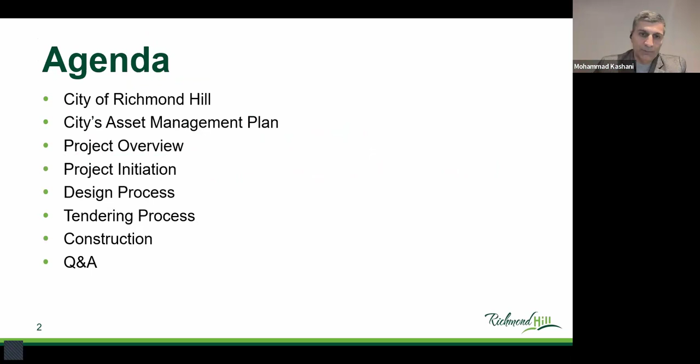The City of Richmond Hill is committed to delivering exceptional public services. Our strategic plan focuses on three pillars: growing a livable, sustainable community, focusing on people and connections, and strengthening foundational systems. Richmond Hill's balanced approach to supporting the environment, the economy and its people underpins this project. We'll explore how strategic priorities and innovative methods such as trenchless horizontal directional drilling, or for short, HDD, help deliver exceptional services to the residents of Richmond Hill.

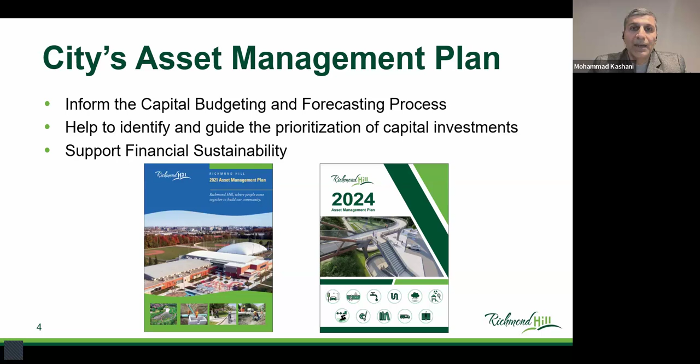Our asset management informs the capital budget process, prioritizing our investment in general and ensuring financial sustainability. We manage over 430,000 infrastructure assets like roads, water mains, sewers, parks, facilities, and many more. These infrastructure assets deliver critical services, and our approach ensures that this infrastructure remains efficient and cost effective for the residents of Richmond Hill.

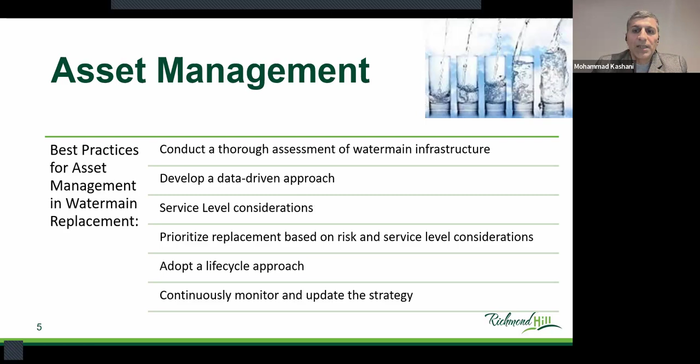So particularly for our Bathurst water main replacement program, the best practices of asset management include conducting comprehensive condition assessments, developing data-driven strategies based on these condition assessments and the risks, considering the service level standard in decision making, prioritizing replacement based on risk and public safety, using life cycle approaches for planning, and continuously monitoring these updates and strategies to make sure they are relevant. By following these practices, we ensure sustainable and effective water services for everyone.

So how do we select the project? That's why I just started from inception. I went a little bit before to tell you how a project starts from a high level, from the master plan, from the strategic initiative of the city, then into asset management. And then asset management will help us to pick the project by preparing a project need form, and then also including the project as part of the 10-year capital plan.

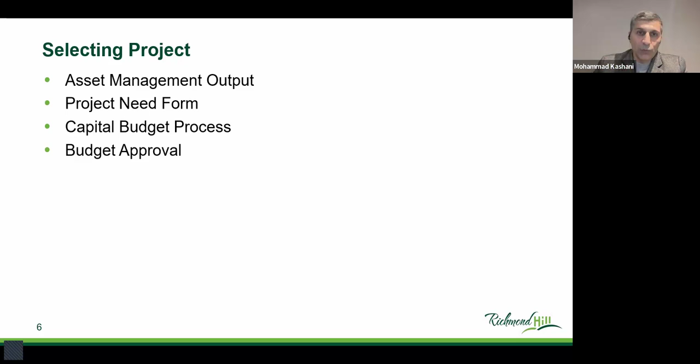We prepare the 10-year capital plan, and then we go through securing the approval from council and the budget approval from council. This process follows Richmond Hill's five-stage budget strategy, which involves planning, reviewing fees, forecasting capital needs, and approving the budget as a whole. Once the project is approved as part of the capital budget, then it becomes an active project, and it'll come to my team to be delivered.

So now we have an approved budget, and although this project has been approved and constructed, and we even went through the warranty and everything is completed, I'm just saying this is the typical approach. Going back to the Bathurst water main, this project involved replacing approximately 1.8 kilometers of aging metallic water main, including ductile iron and cast iron water main installed back in 1978. At the time we replaced them, they were 44 years old, and we experienced a lot of breaks in this stretch.

And we replaced them with PVC water main to meet the city's current standard and the MECP Safe Drinking Water Act. This initiative was vital for ensuring the sustainability of the city's infrastructure, reducing water main breaks, and minimizing disruptions to residents and businesses due to water main interruptions. Additionally, the project was carefully planned to avoid disturbances to nearby creeks, protect the redside dace habitat, and minimize tree removals and impact within the York Region right-of-way.

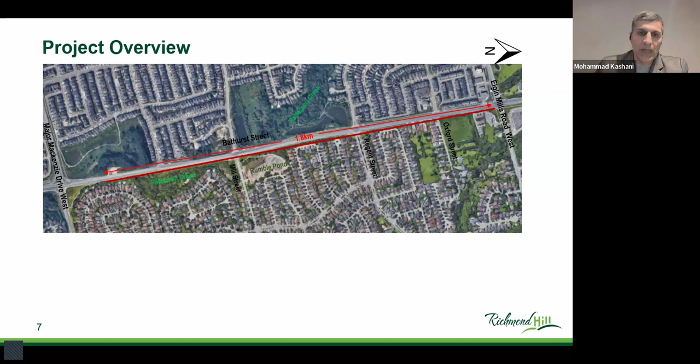I will get into more details if you need it. Because I need to tell you from beginning to end, I will try to go a little fast with the overall process and focus on the process. But really, what we are trying to do when we have a water main replacement in general: this project aimed to provide water distribution services that support domestic consumption and have sufficient capacity for firefighting purposes.

In York Region, we have a two-tier municipal government. We have the regional government, which is York Region. They look after the trunk mains and those big pipes. And then the local governments like Richmond Hill, City of Vaughan, City of Markham mainly look after the distribution lines, the smaller pipes, but the ones that deliver potable water to all the residents.

When it comes to the water main, there are two balancing factors. One is pressure, another one is capacity. When you have a bigger pipe, you have more capacity, but then you have to make sure that you have sufficient pressure for firefighting, and you need to balance these two factors. Therefore, you need computer modeling because it's a system. It's not in isolation, only the 2 kilometers. You have to make sure that the modeling gives you the appropriate size.

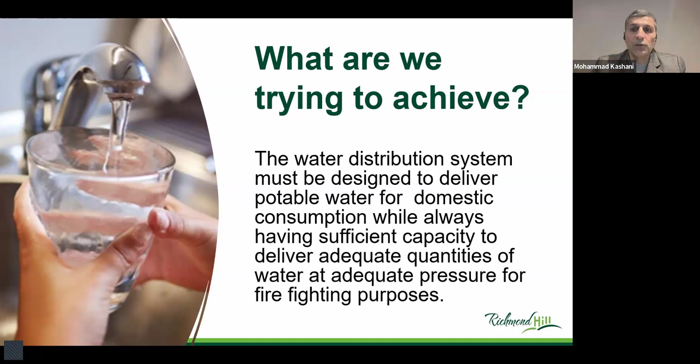So now that we have this project, how are we going to initiate it? As I mentioned, in the City of Richmond Hill we follow best practices, and one of them is to follow PMI. We have a PMO manual in the City of Richmond Hill that we follow. For instance, one aspect of that is to sign the project charter. We don't initiate any project before we get the project charter signed by our upper management, and within the project charter, we prepare the overall goals and milestones.

Once that's signed, we host an initiation meeting to gather stakeholders' input. Then we develop the terms of reference for the consultant to obtain the proposal and assign the project to consultants. And then we hold a formal kickoff meeting to introduce the teams and align on scope, risks, and schedules.

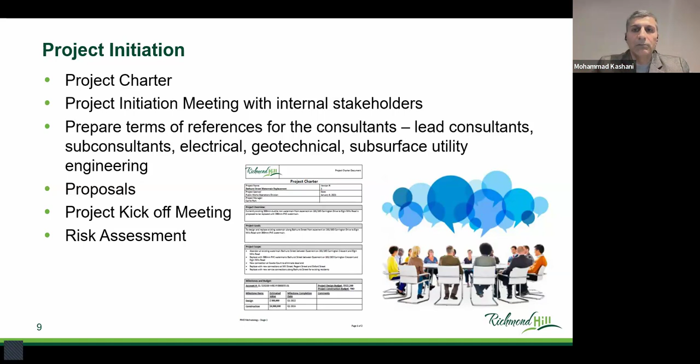So that's the project charter. And then during the design, we go through the project management plan. We look after the risk registry, stakeholder management, all these kinds of things, which starts from the project charter and goes into the project management plan, and so on and so forth, which I will mention throughout the presentation.

Once the project charter is signed and the kickoff design is initiated, technically we are into the preliminary design. And as part of the preliminary design activities, first and foremost, we need to conduct a topographical survey and gather historical engineering drawings. These steps help establish a foundational understanding of the existing condition and serve as a baseline for future design works to come.

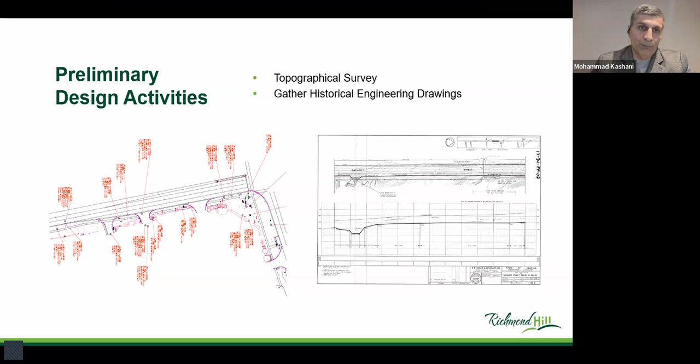The next step is to move into the geotechnical investigation and subsurface utility engineering, or SUE for short. I will refer to that as SUE, to account for soil conditions and underground utilities, which are essential for minimizing risks and guiding the design process effectively.

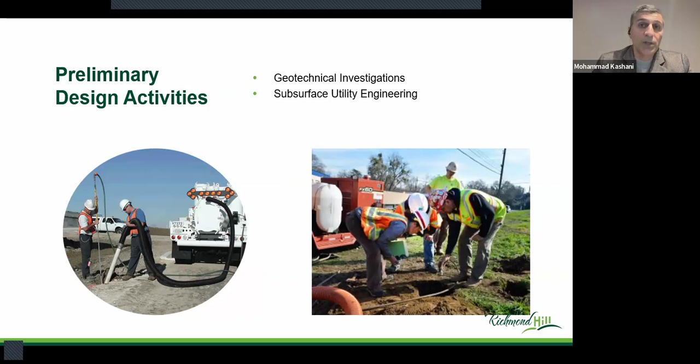Another vital component of the preliminary design activity is tree inventories. We go through that to find the health of all these trees, and then if we are impacting the trees by removal or trimming, what kind of mitigation measures do we have in place, and in the worst case scenario, what would be the compensation plan to address any environmental considerations.

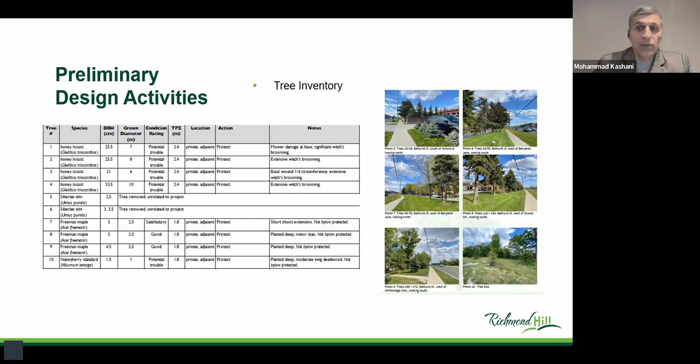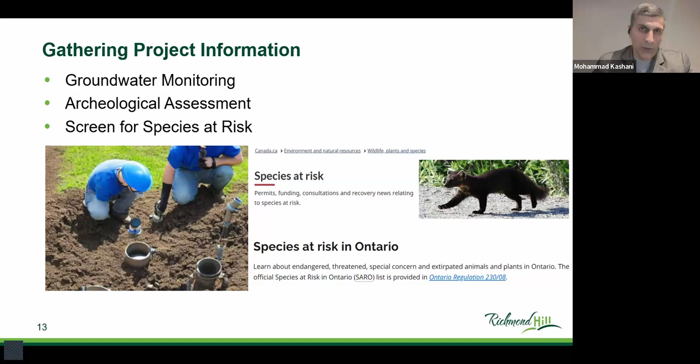Other activities as part of the preliminary would be to gather groundwater monitoring, archaeological assessment, and screening for species at risk. These tasks ensure compliance with environmental and cultural regulations, helping us mitigate risks and prepare appropriate mitigation plans.

So once we've done these kinds of activities, then we are ready to put together a 30% preliminary design. What entails in preliminary design? We need to look at the potential utility conflicts, adhere to CAD standards, and prepare detailed reports if required. And we also focus on stakeholder management, property clearances, budget allocation and schedule planning to ensure design progresses smoothly. Let me pause here, especially for water main designs.

This 30%, in my opinion, is very key, as opposed to rushing through the 30% design. I know sometimes we have a deadline and there is pressure to get things done, which we are all cognizant of, but it's very crucial early on in the design process, like at 30%, to really take a step back and see what would be the best approach for that specific project.

For instance, in this case, we could have not done that and said, okay, you know what? The conventional method of construction for water main is open cut. 80% of the project is open cut. Okay, let's go through the open cut. But that would have been a very huge and costly mistake. By adopting HDD, we avoided that.

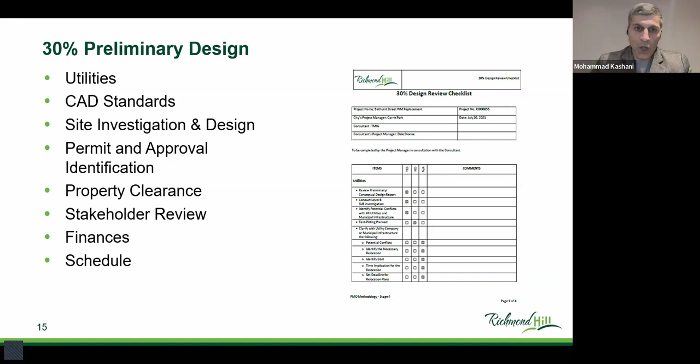So at 30%, take your time to make sure you are doing proper planning and also engage the stakeholders early on. Then we go into the 60%. And as part of 60%, you are still going to deal with the utilities. And at this point, you will refine the horizontal and vertical alignment. So at 30%, typically you just deal with horizontal alignment, but at 60% now you get into the vertical, and also QA/QC reviews and resolving any constructability issues.

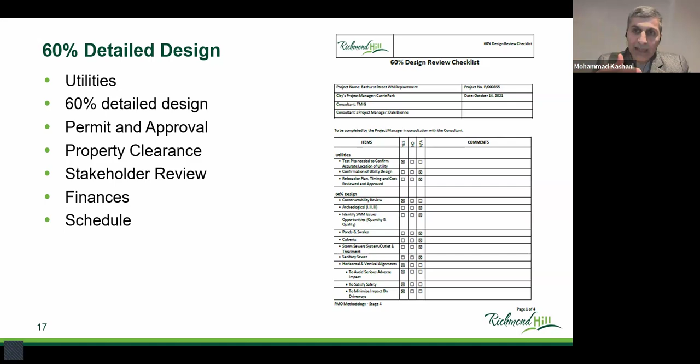Additionally, we focus on ensuring permits are at least initiated for permit requirements, addressing any stakeholders' feedback, and ensuring the design schedule is aligned with the construction timeline. So now you pass the preliminary, and now you are going to get into more detailed design. I'm talking about geotechnical investigations, which are very important for designing underground pipelines.

And part of it is you need to have data for the soil types, for the backfill recommendations and shoring recommendations, and ensuring safety and compliance with regulations.

If you don't have this information as part of your tender, then the contractor won't be able to provide those information. So then you are going to get into either change orders or claims and back and forth. So therefore, it's important to have a reliable geotechnical investigation to provide the necessary information to the contractor, and also for your design to be able to come up with an appropriate design and successful construction.

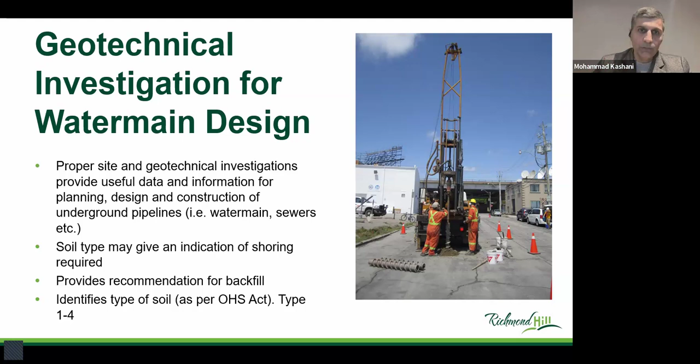When I talk about different types, we have 4 types based on the OSHA or OHSA regulation. We have type 1, which is a cohesive soil, and get into type 4, which is non-cohesive. So for each of these types of soils, we have different requirements for shoring that the contractor needs to conform to the OHSA regulations. How they can do that? By knowing the different types of soil in your geotechnical investigation.

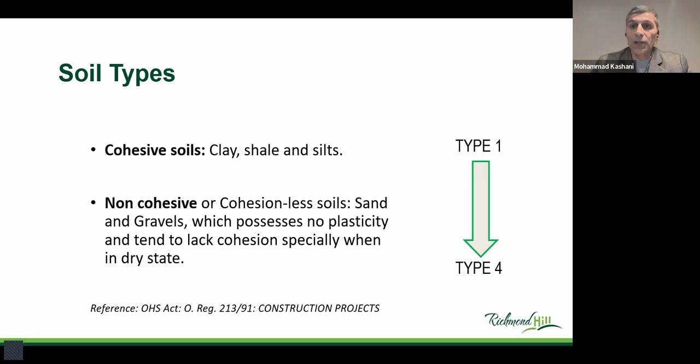A comprehensive geotechnical report includes borehole data, groundwater monitoring results, and a plan for managing excess soil, which helps ensure the project adherence to environmental standards. If you heard recently, back in 2021 and 2022, now for a few years, we are dealing with an amended regulation that requires us to have excess soil management in place for all the construction projects, which starts from the detailed design. At the detailed design, with the geotechnical investigation, you need to have characterization of soil and have an excess soil management plan in place. So these are all important steps.

And trust me, if you don't have this information, especially nowadays, none of the receiving sites are going to accept your soil. If you don't do it during design when you have time, you can do it with a proper investigation, with a better quality of investigation. Otherwise you have to do it very costly during construction with change orders and standby time, which you don't want to do.

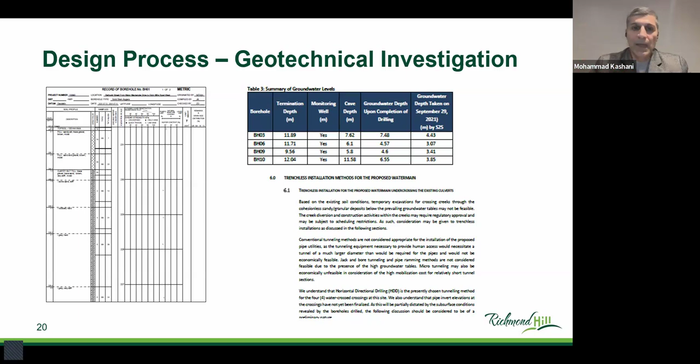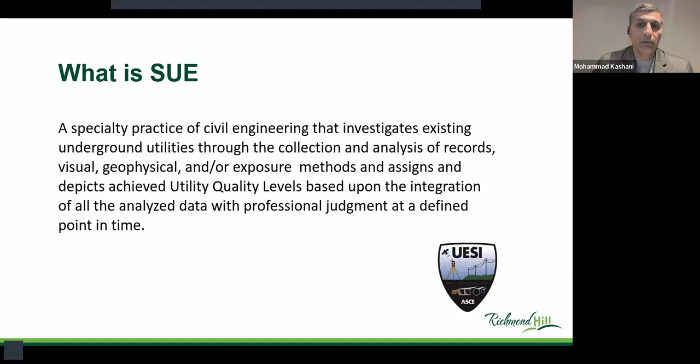So after that, subsurface utility engineering, or SUE. SUE involves locating and mapping existing underground utilities using various methods, including geophysical and visual analysis. This data is classified into quality levels. There are 4 different quality levels: D, C, B, and A. And quality level A is the highest accuracy through utility locating.

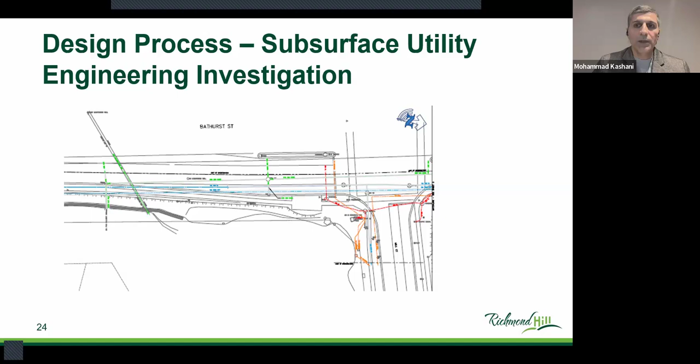At the 30%, we need to do quality level D, C, and B, which is kind of to identify the utility conflicts. And then once you have that, at the 60%, 90%, you are going to have quality level A SUE, which provides precise data for locations and for construction purposes.

Let me find this laser pointer to show you. Here, you see, you are going to have a test pit and test hole just to exactly verify where this utility is located. If you are planning to have the water main that goes beneath or above, how you are going to plan for that. So having detailed information at the 60 and 90%, SUE level A is the way to go.

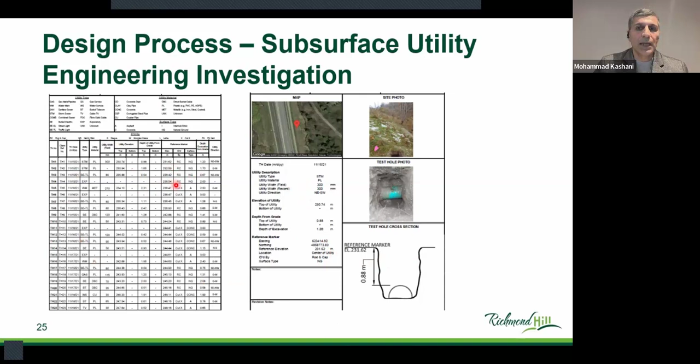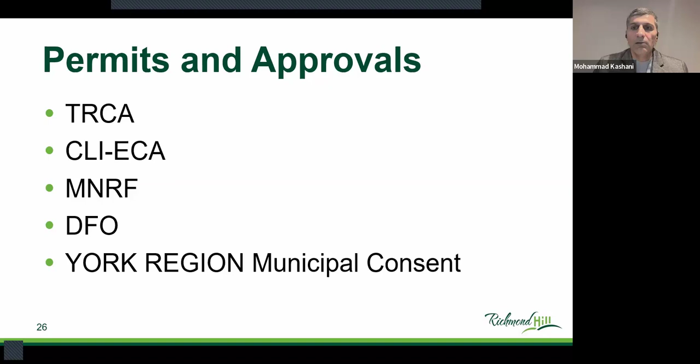Once that's done, the next step as part of your 60, 90% is that you need to obtain permits from TRCA, MNRF, DFO, York Region, you name it, the ones that we require for your specific project. These approvals ensure compliance with regulatory and environmental standards. Then you are ready to wrap up the design at 90% or 100%. At that stage, when you are finalizing your design, basically you are finalizing your utility relocations, alignment, cross sections, and tender drawings all together.

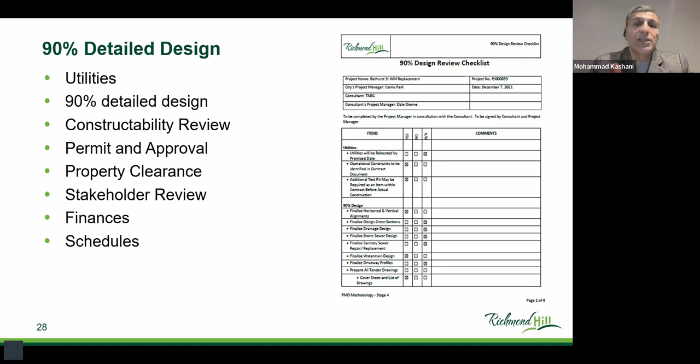Also at this stage, you have to have your specifications, terms, the schedule of prices, and all those details for your agreements. Everything needs to be sorted out. And the more important step at this point is you have to make sure that the constructability reviews have been conducted, and you have all the permits in hand. Or if you don't have them, you know that they will be ready soon, at least.

So once the design is done, now we are going to go into the tender. But before that, we have another gateway in the City of Richmond Hill. We need to prepare the pre-tender checklist. And that checklist will verify that we have all the permits, property clearance, utility relocations, we have the budget approved, and we are ready to go. All the QA/QC is done, we review all these things, and we sign off on that.

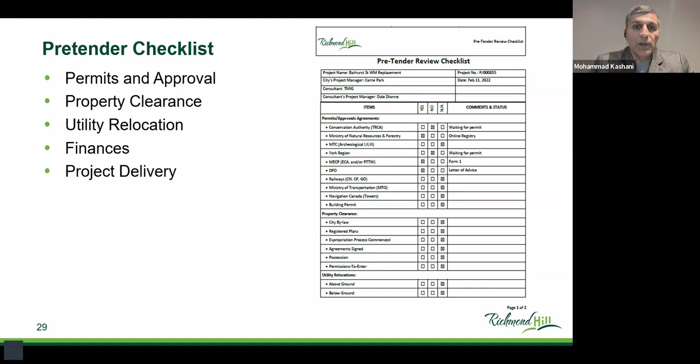And then the next step would be to go through the tender process. The tender process in Richmond Hill is facilitated by our procurement division, and we invite the pre-qualified contractors via the Bids and Tenders platform. In Richmond Hill, how we approach procurement is a two-stage process, let's say.

Step one is that we do a pre-qualification. And step two, which is price only, we invite only the pre-qualified contractors to bid. This allows us to qualify all of our contractors. So we have different categories. We have, for instance, for road, for underground work, for electricals, different lists of pre-qualified contractors.

At the beginning it is public, everybody applies, then we review that. We have a requirement for COR certification to make sure they have a pretty good health and safety policy and procedure in place. And once we qualify them, we typically qualify them for 3 years. Within that 3-year term, we just invite those pre-qualified contractors for stage 2, which is competitive bidding, low bid only. And then we repeat this cycle.

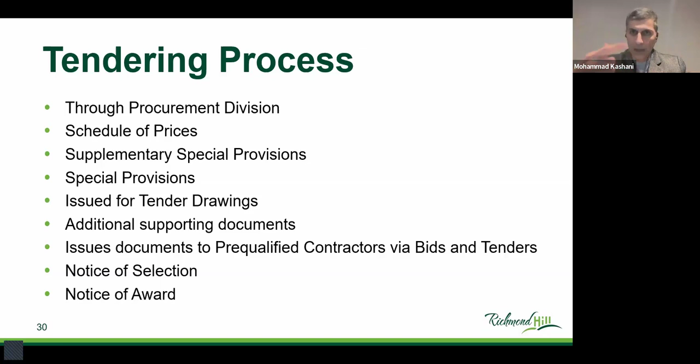Then we get into the construction, which is the phase where we focus on detailed planning and execution to minimize disruption while maintaining safety and efficiency. The key steps include preparing a staging area, securing permits, and setting up traffic control measures.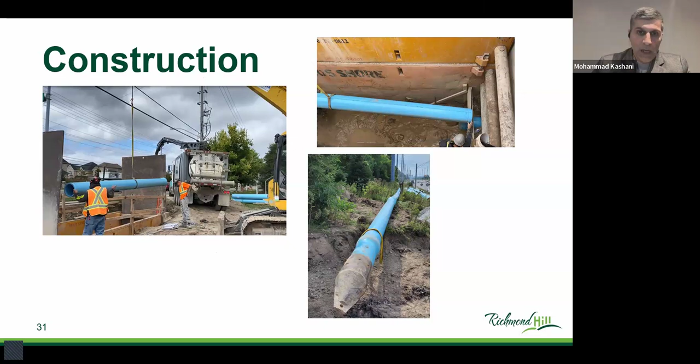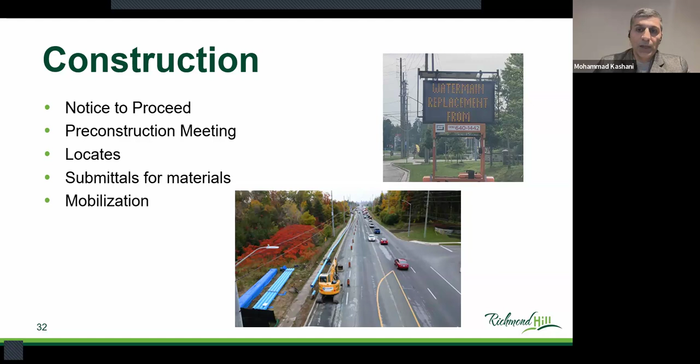The activity begins with a notice to proceed, issued to authorize the contractor to begin the work, and then there will be a pre-construction meeting. The locates need to be ordered and in hand before any digging, and then submittals for the materials, any shop drawings review, and at the end, mobilization to allow the contractor to prepare equipment and resources on site.

Now, methodology. For water main construction, typically there are two: open cut and trenchless. These are big categories. If I want to numerically tell you the percentage, especially for the distribution lines, not the trunk mains, I would say still 80% are open cut and 20% trenchless. And there's a reason why. Somebody may ask me, Mohammad, if trenchless is that great, why is it not 100%?

Because with the distribution line, imagine every 5 meters, 10 meters, you have to have a service lateral to go to the houses, residents, businesses. So even if you put the main line in trenchless, you have to go back for every individual connection. You have to dig down and do the connection. So in a way, it defeats the purpose. Having said that, some contractors still prefer to do that. And in some cases, we have to do that.

And to be honest, it's not open cut versus trenchless. In most cases, we have a hybrid solution. If you need to go under a creek or something, you still need to do trenchless. So the best approach is not black and white, it's an amalgamation of both methods. So now,

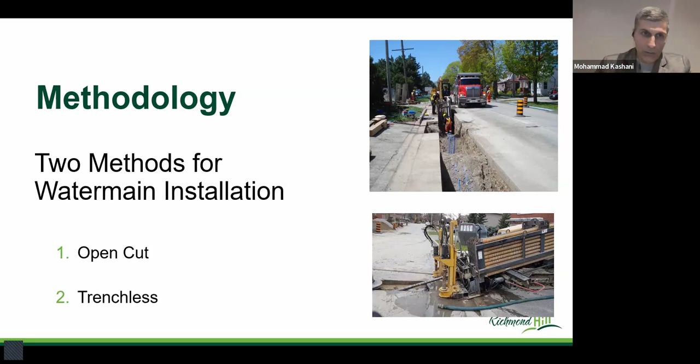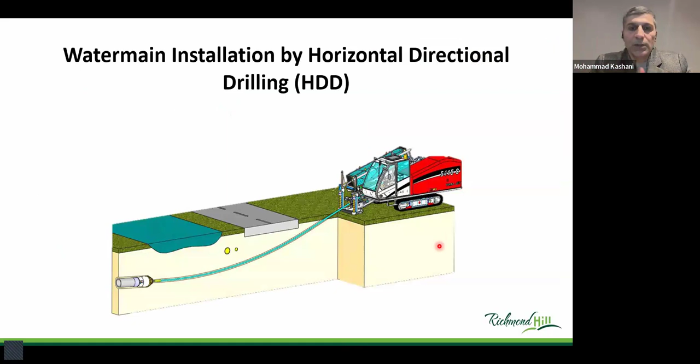HDD, for instance. This is a 3D illustration of HDD, which involves drilling beneath the surface to install pipe without extensive excavation. This minimizes disruption to roads, creeks, utilities, you name it. And it's very effective and efficient. How does it work? We start with one of these HDD machines. I don't know if you saw that.

It starts from the pilot bore. There is a 2 to 4 inch pilot bore that they start, going through the alignment all the way from the entry pit to the exit pit. And then at the end, they connect the reamer to widen the hole. Let's say you have a 6-inch or 12-inch pipe, the pilot bore goes there, and the reamer needs to widen this hole to allow the pipe to come in.

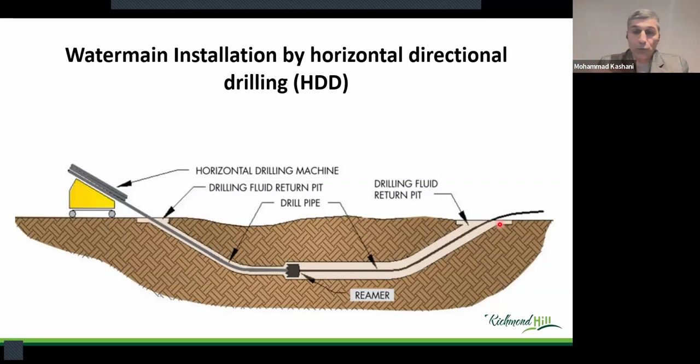And sometimes this cycle is not just one go. Sometimes they have to repeat this process to have it wide enough to pull the pipe into the hole. The PVC pipe can be fusible PVC, or it can be individual PVC pipes that they connect. For this one, we had a combination of both: fusible PVC and TerraBrute from IPEX, which we put together. So that's how it is done.

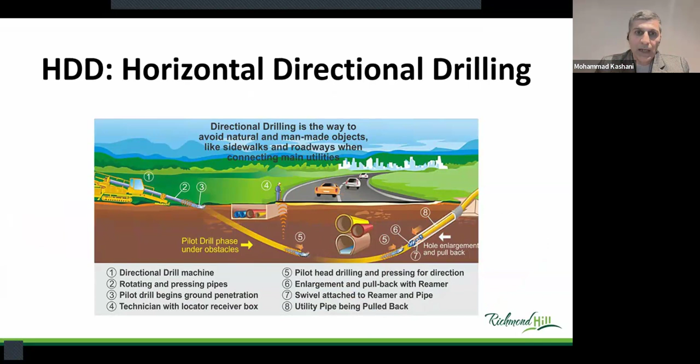Here is another showcase where the pilot bore is being bored underneath all the utilities and roadway, from one side to the other, minimizing the disruption to traffic, and all those good qualities of HDD. So you see the entry pit and exit pit, and these vary in size based on whether you have a fusible PVC.

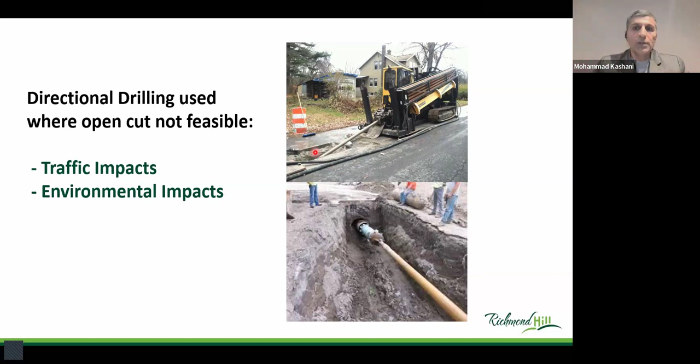On one hand, the pit that you pull the pipe through needs to be big enough to allow for the pipe, especially if you have individual pipes. These are in 6 meter lengths, so you need to have enough room to pull through the pipe.

Once the pipe is installed, now is the time for testing. We have 2 types of tests: pressure test and disinfection. The test begins during the design phase and continues through construction to ensure compliance with commissioning requirements. The pressure test identifies leaks or weaknesses in the pipelines, allowing necessary repairs.

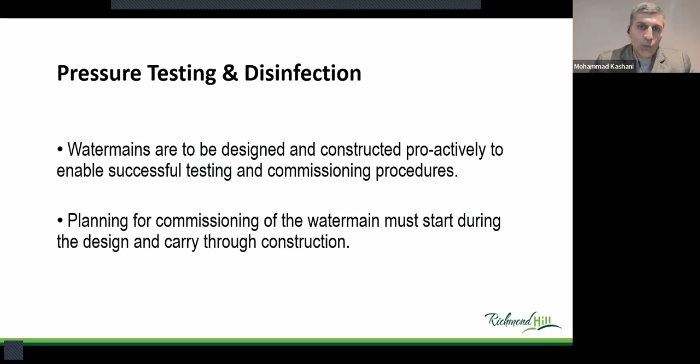So what does it mean? Let's say we have to have the maximum pressure plus 50%, and it has to hold it for 2 hours. Typically, it's 100 psi, the maximum pressure within the pipeline. So we test for 150 psi, and we put the pressure into the pipe for 2 hours, and it has to hold that water within the allowable leakage. And when I say allowable leakage, that's to allow for the expansion and all these kinds of things for the new PVC pipes. And it has to hold it for 2 hours.

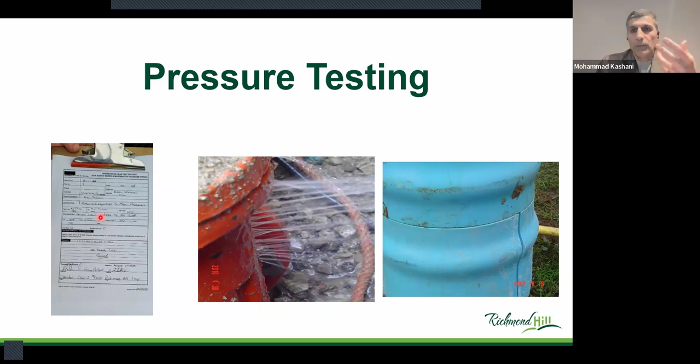There would be a form to sign. And once this test is passed, then we accept this as a system that can hold the pressure, and we move on to the disinfection test. The watermain disinfection follows the AWWA C651 standard, ensuring water quality and safety. A disinfection plan is submitted and approved before work begins.

For the method of disinfection, there are 3 major methods: tablet, slug, or continuous feed. To be honest with you, everybody follows continuous feed. And in the City of Richmond Hill, we do continuous feed, which means introducing chlorine gradually into the flow of the water to disinfect all the appurtenances, and we have to allow for 24 hours contact.

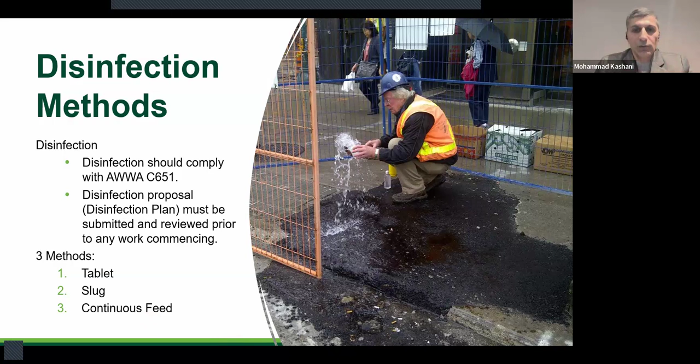We drain that, and after we drain the pipe, then we have to take the 2 consecutive tests. We send them to the lab, and they have to pass the microbiological test. These are all the sort of procedures that we follow under the provincial regulation, and we make sure that the drinking water is safe before we commission it. There would be a form like this to fill out, and we make sure that everything passes. We need to have 2 consecutive passes.

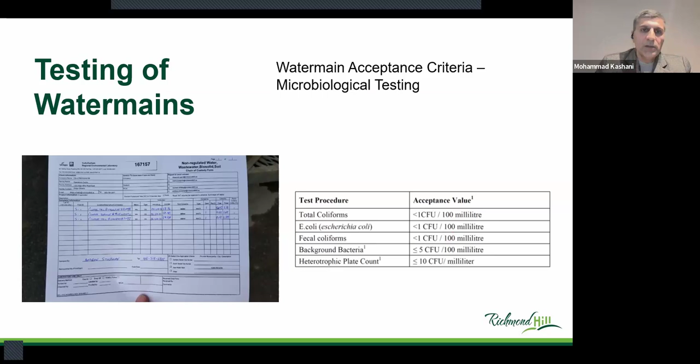If the first one fails, obviously we have to repeat. Even if the first one passes and the second one fails, we go back to repeat this process. And unfortunately, last year we had a tough time with a couple of our projects. We had to repeat that 10 times or 12 times. It happens. Typically after 1 or 2, if they take care of it during the installation, everything goes smoothly. And once you have the 2 consecutive passes, then you are ready to do the final connection, transfer the laterals, and you're good to go.

So now I have 2 videos that I would like to show you to wrap up the presentation. This first YouTube video is for our Bathurst water main. Let me see if this works.

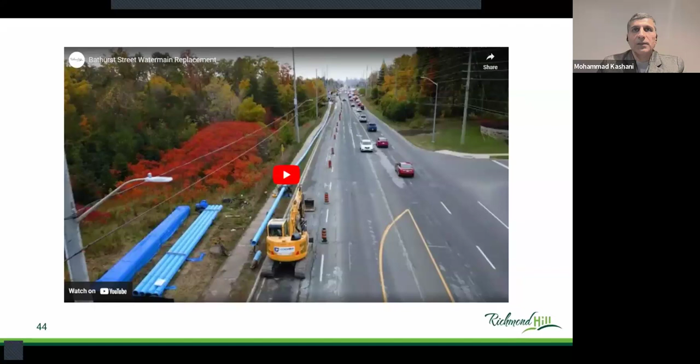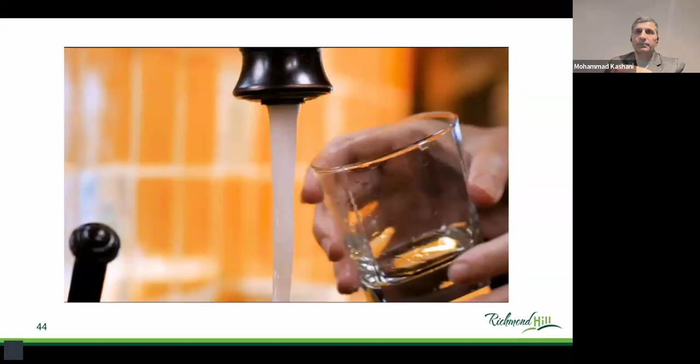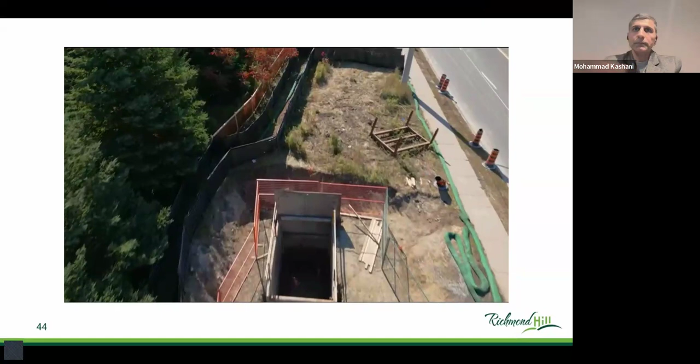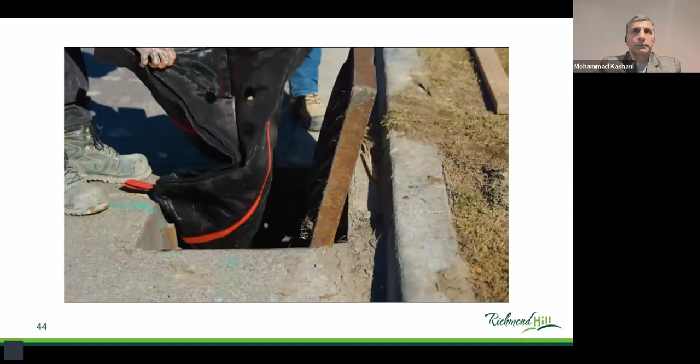At the City of Richmond Hill, we are committed to protecting our natural environment, including trees and native species. When we need to replace aging infrastructure, such as the water main pipe that brings safe, clean water to our residents, we use environmentally sustainable ways. For example, when we replaced the water main along Bathurst, we used horizontal directional drilling, reducing the amount of waste being generated and minimizing erosion. We put up fencing around trees in the area to protect them, extending their health and longevity. We installed biodegradable fencing to prevent sediment from running into the creek, and installed catch basin filter cloth to prevent sediment from entering the stormwater system to protect the natural habitat of endangered species. These are just some of the many ways the city is using environmentally sustainable methods to deliver reliable services to the community.

And I have one more. So this is the first HDD that we did along Major Mackenzie, from Bathurst to Yonge. And this is another YouTube video that we published a couple of years ago. So I will play this one as well. Hopefully this is okay.

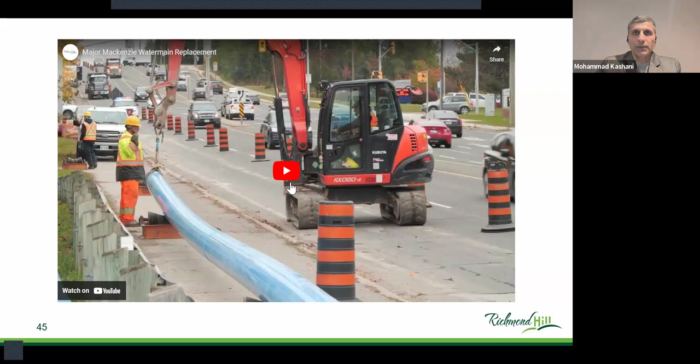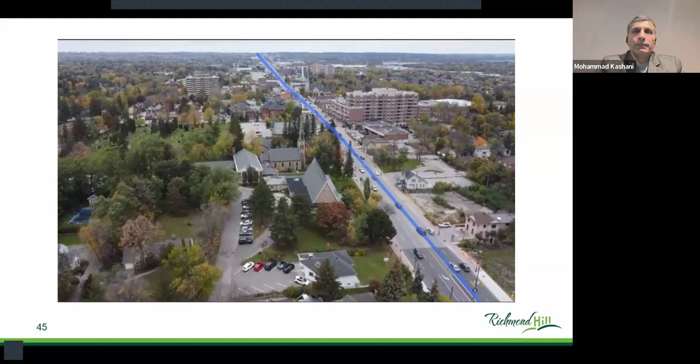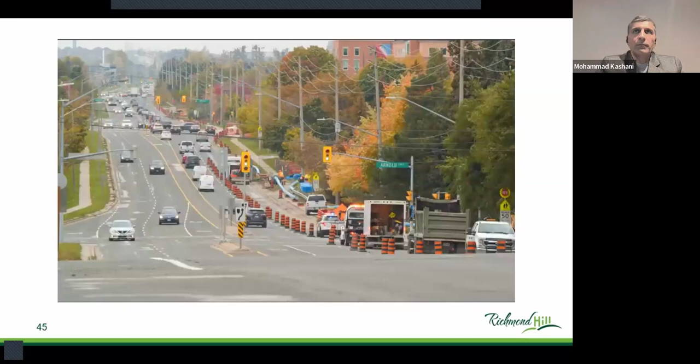The City of Richmond Hill is always looking for innovative ways to maintain and repair infrastructure. Did you know a watermain is an underground water pipe that delivers safe and clean water to your home? Richmond Hill manages 640 kilometers of water main that service our neighborhoods. It has plans in place to repair or replace water mains when required.

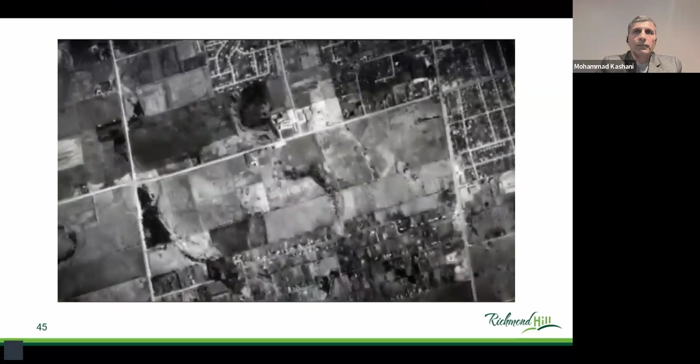This ensures the reliable supply of water. The water main along Major Mackenzie Drive between Yonge Street and Bathurst Street was installed in the 70s. Due to increasing frequency of repairs, it was determined that 1.6 kilometers of it needed to be replaced.

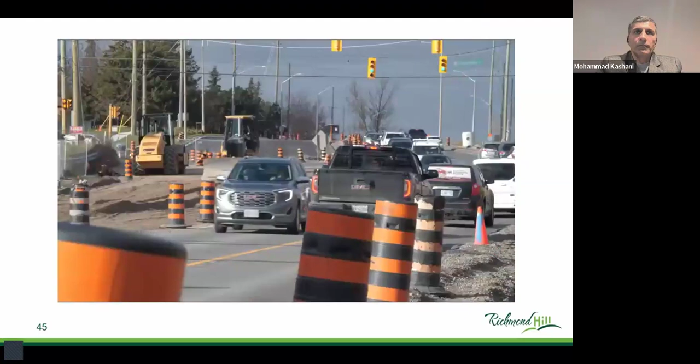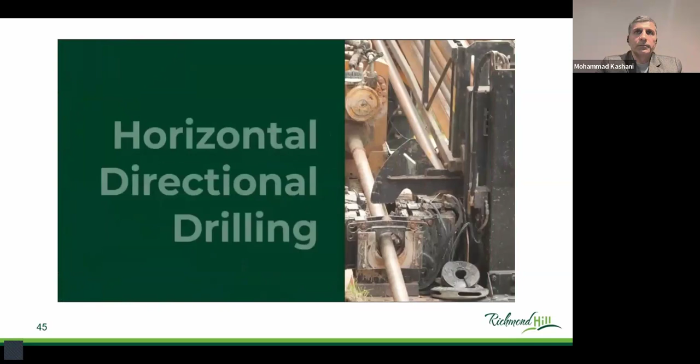Traditional methods of replacing water mains mean traffic congestion and disruption to motorists and pedestrians. Instead, the City of Richmond Hill opted to use a minimal impact trenchless method of installing underground utilities known as horizontal directional drilling. It required less digging and allowed the water main to be installed underneath existing infrastructure, trees, and creeks.

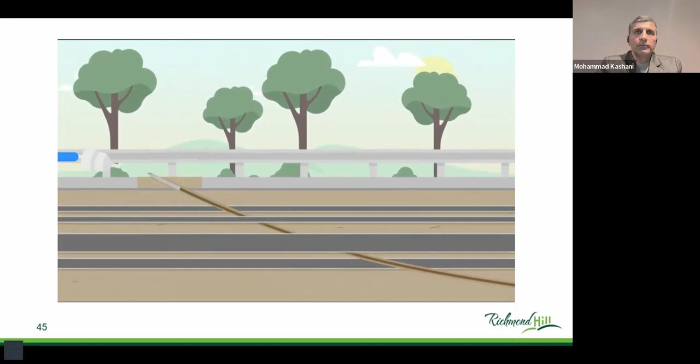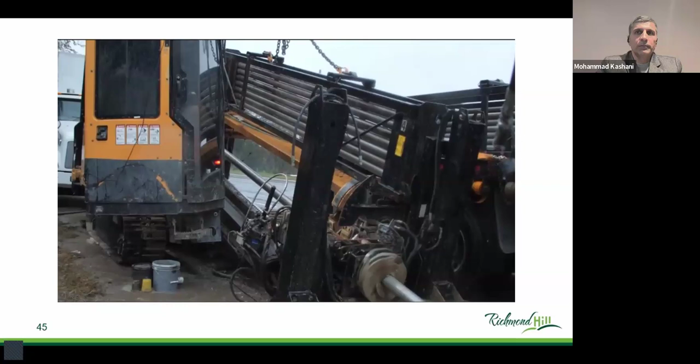Horizontal directional drilling is typically twice as fast, reducing the repairs needed on the road and minimizing traffic congestion. Using HDD also ensured that there was no interruption to power or other services in the area, including to the hospital. This is just one of the ways the City of Richmond Hill is being innovative through the use of modern technology to minimize disruption.

And with that, thank you very much. Now we are ready for questions, but I know that Tony needs to tell you something about the enrollment, if you would like. So I will pass it on to Tony, and thank you very much. And I'm ready for any questions.

All right, well, thank you. Thank you very much, Mohammad, for that insightful presentation. It's always great to see how municipalities like Richmond Hill are using innovative approaches to enhance water infrastructure while prioritizing safety, sustainability, and service reliability. Your detailed breakdown of the Major Mackenzie water main replacement project really highlighted the importance of strategic asset management and cutting-edge construction techniques.